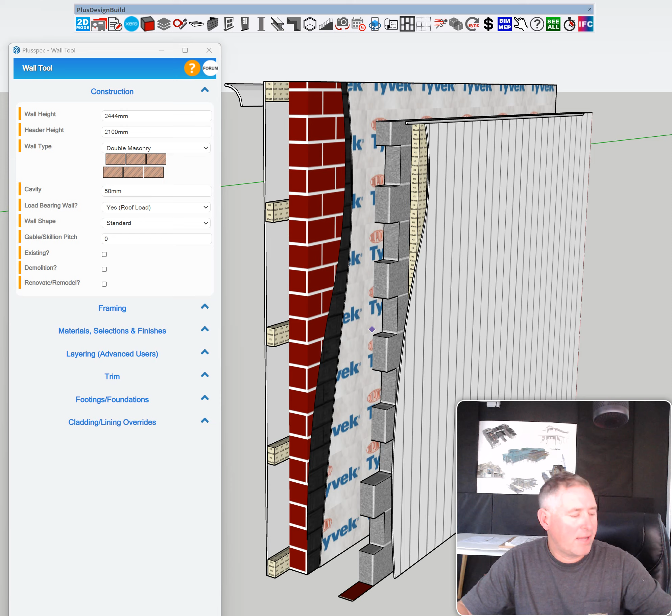Guys, we've been asked for this particular wall type by a lot of passive house designers, so they can get an airproof barrier. And what I'll do is I'll quickly draw these for you and show you how to do it. So I've opened up the wall tool, which is up here. I created a keyboard shortcut of W, and essentially choose double masonry, right? So from the drop down, double masonry, then go to framing.

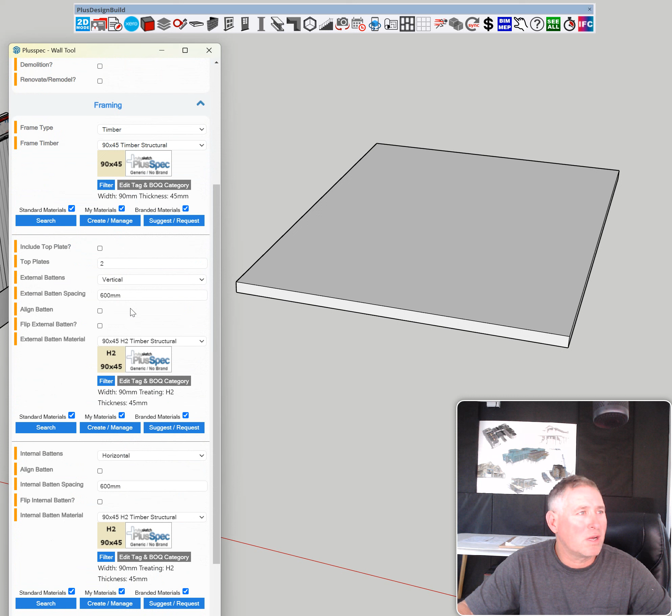And then inside of your framing, you're going to choose external battens vertical. They can also be horizontal as well. Do that because probably that cladding type should use that. And internal battens, you would choose those as well. And then when you go down to your materials and selections, you would choose a material for your external side of the wall. And you can see there that I've got a Hardie's product. And you can also choose other membranes as well for inside of the wall. And I'll explain that a bit in a second.

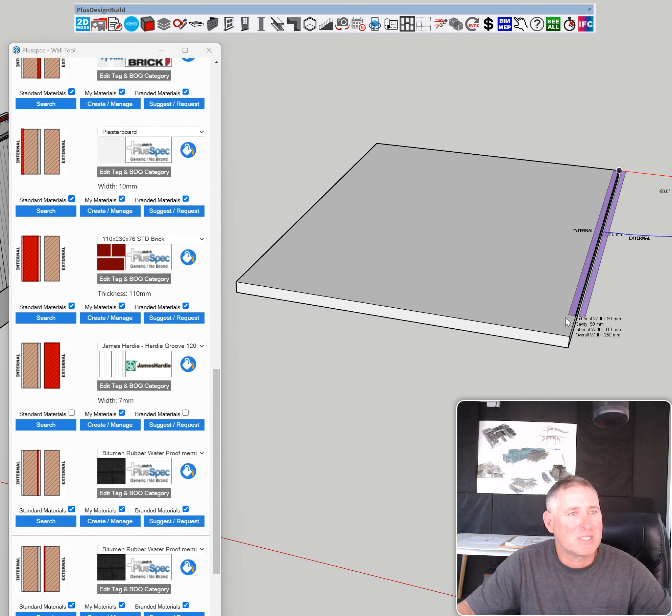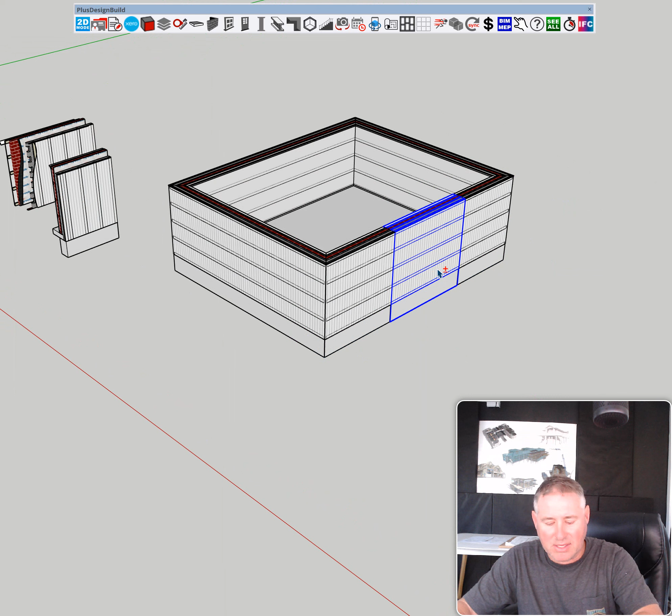But essentially, once you've done that, simply go and trace around your walls. And yes, they are parametric, so I could actually go in and push-pull those walls and move them around, or I could split them. Split wall. And I'll split it here and here. And the same thing again. Yes, they're parametric. They'll change as you choose.

You can also go and change the wall types to suit yourselves as well. So I can change 3 or 4. So let's change this to a masonry veneer instead. Submit. Right, and you'll notice that it's changing the wall construction type according to whatever it is there. And you'll notice that the footing sizes can also be changed as well if you choose.

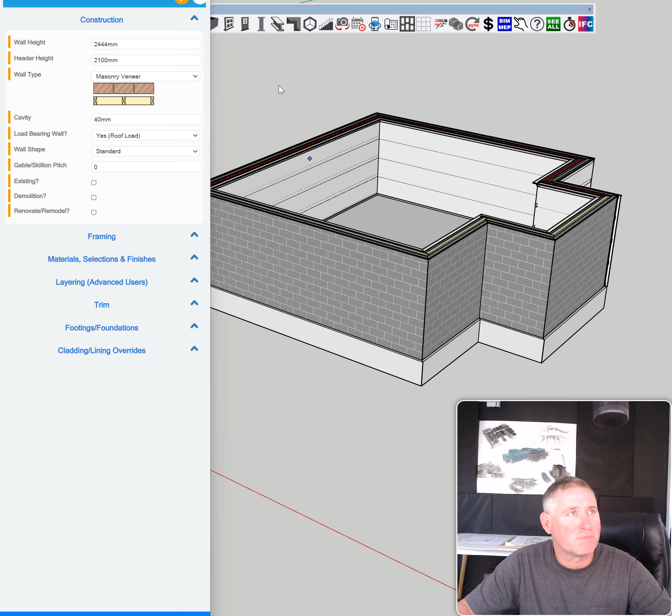I'll just explain the membranes and everything. The reason I cut this away was that first you can have a membrane underneath the brickwork. Could be termite barrier. You have your battens there. You have your trim. You have your cladding. You also have your Tyvek in this case. You can also have another membrane here. It could be a waterproof membrane.

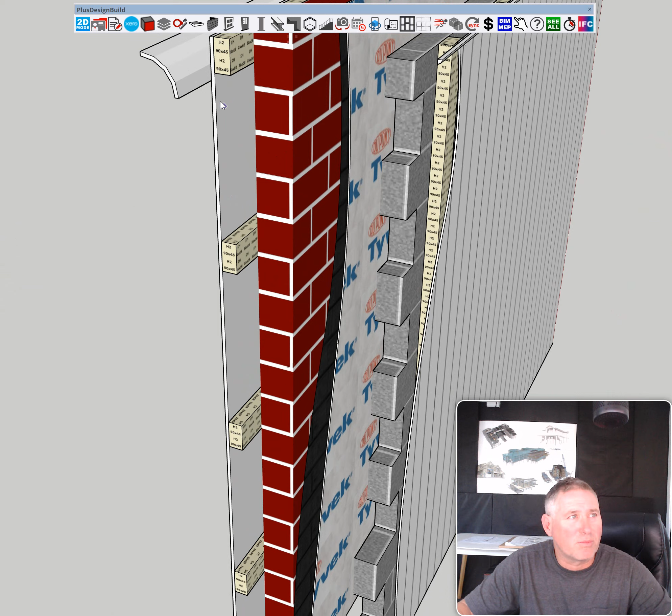You can see you've got the internal battens there. You have your trim there at the top and trim at the bottom. And basically that whole wall is drawn for you. And when you do a bill of quantities on it, obviously you're going to get a quantity for everything that's inside of there as well, including price.